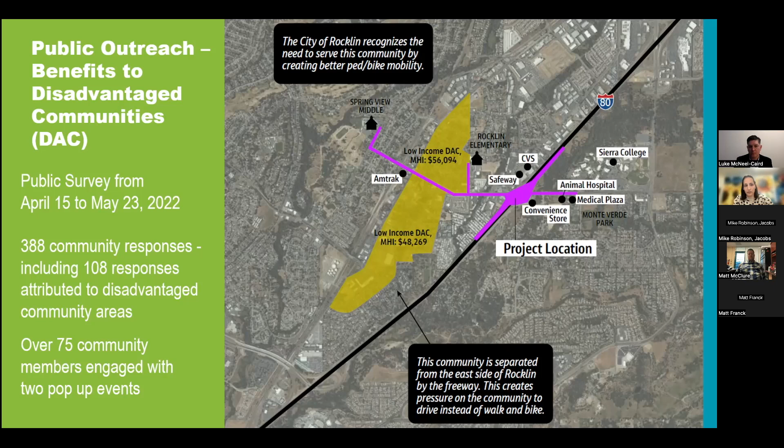This project originally dated back to 2011, 2012, where 3 additional concepts were being looked at as part of the initial project. Concept 1 was a westbound on-ramp flyover, more towards Sierra College, where at the Aguilar Road intersection an on-ramp would start and go over to the westbound on-ramp. That concept proved to require too much right-of-way acquisition, and it just couldn't fit in the land we had available.

Concept 2 looked at adding roundabouts at both the west and eastbound on-ramp intersections. Roundabouts have worked in Rocklin and other locations, but due to the installation of ramp metering, traffic would back up and essentially create gridlock in those roundabouts. So we moved on from those.

Concept 3 was to widen Rocklin Road to 3 lanes in both directions through the extent of the project limits, and that was extremely costly. So at that time, the project stalled out, and we have moved on now to what we're looking at currently.

Which is the diverging diamond interchange. We had a feasibility study completed in 2020, and after that proved a diverging diamond could function in this interchange, we began the environmental document process, which we are currently in. We started that back in July of 2021, and about a year later, in July of 2022, the first initial draft project report was submitted to both the city and Caltrans for review, with different iterations and comments going back and forth. That is currently where we are at for the project history.

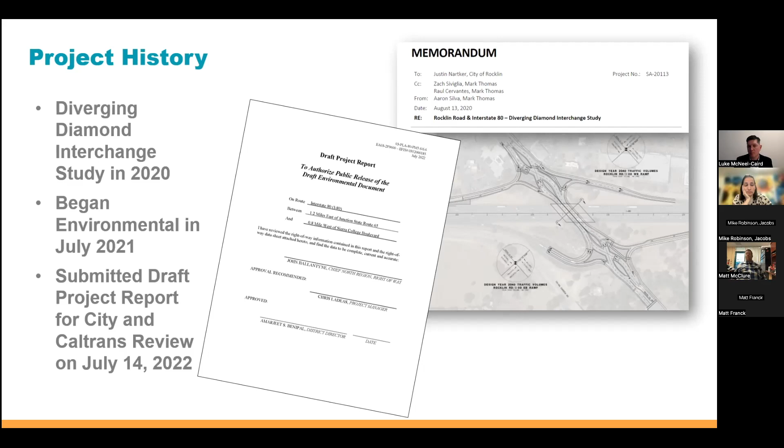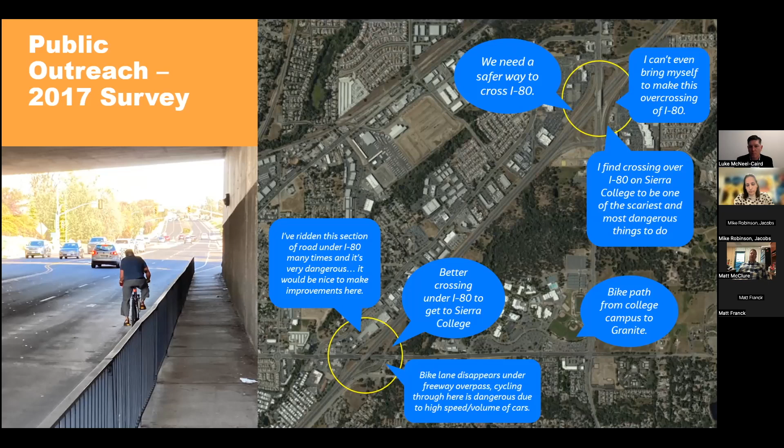Katie briefly touched on public outreach done specifically for this project, but there has also been outreach on a broader spectrum. Placer County Transportation Planning Agency did a bike way survey back in 2017. As part of that survey, this graphic shows comments gathered about not having connectivity from one side of Interstate 80 to the other within Rocklin, specifically at the Rocklin Road I-80 interchange. The community has been saying for a while that we need to address modes of transportation besides vehicle traffic, so that's what we're trying to address here.

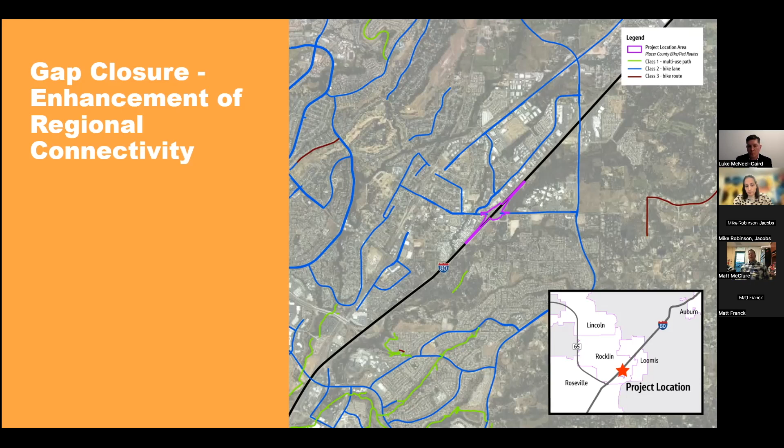This slide shows that our trail connectivity has gaps, and one of the big gaps, as you can see in the purple area, is Interstate 80 along Rocklin Road. Currently, the only way to get on trails is to go up to Sierra College Boulevard, which has even more congestion than Rocklin Road, or you can cross over in Roseville. Both are relatively out of the way for the traffic we're looking to capture and maybe change some modes of travel within the project limits. So this project is looking to close that gap.

We're also looking to assist middle school students. If you currently live on the east side of Interstate 80 and attend Spring View Middle School, it's difficult to walk or ride your bike to school. So one of the hopes of this project is to provide that connectivity, so children going to Springview Middle School have the option to walk or bicycle in a safer manner than they currently have today.

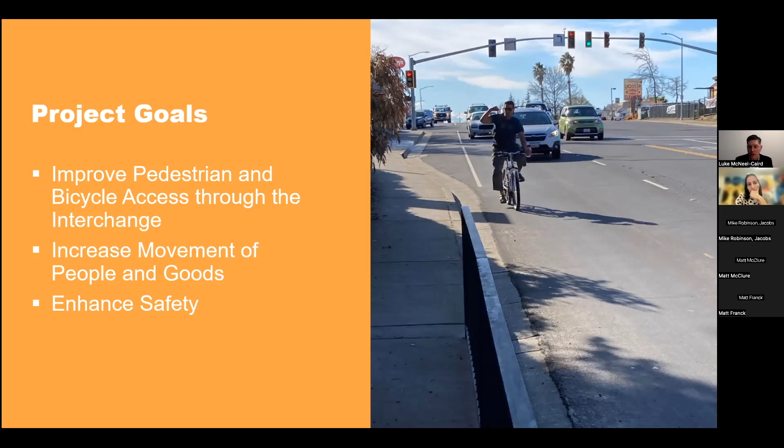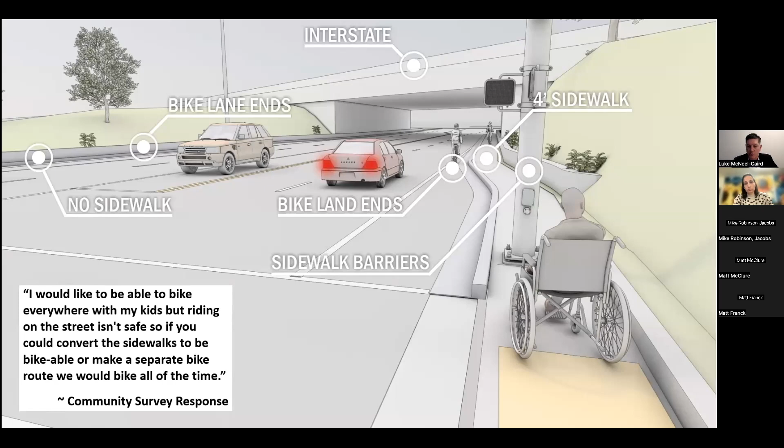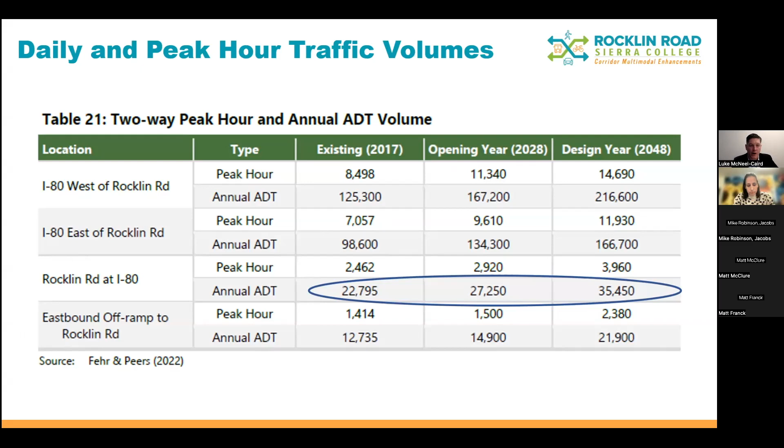You're going to see some of those features as we go through the project alternatives. One of the big things that came out is there's about 23,000 vehicles per day on Rocklin Road, and that's going to continue to increase. But of those 23,000 vehicles per day, we looked at cell phone data and found about 5,000 of them are driving less than 1 mile. So there's a real opportunity here with Sierra College and their 14,000 students for more walking and biking along the corridor.

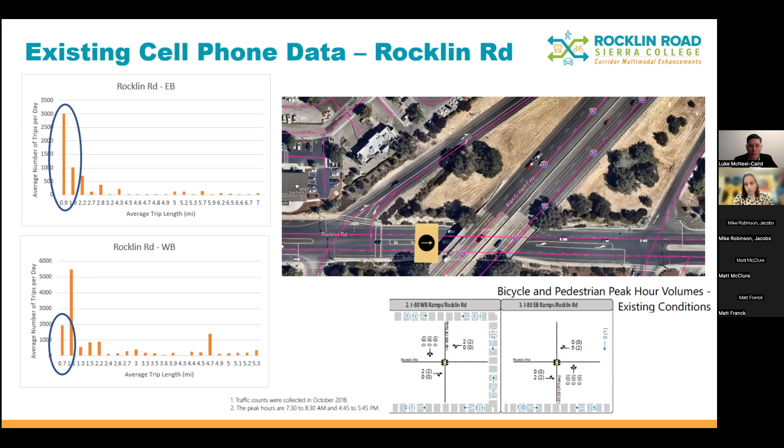We actually have a video here that's going to describe what a diverging diamond interchange is, and then it's going to walk you through the two proposed alternatives for pedestrians and bicycles.

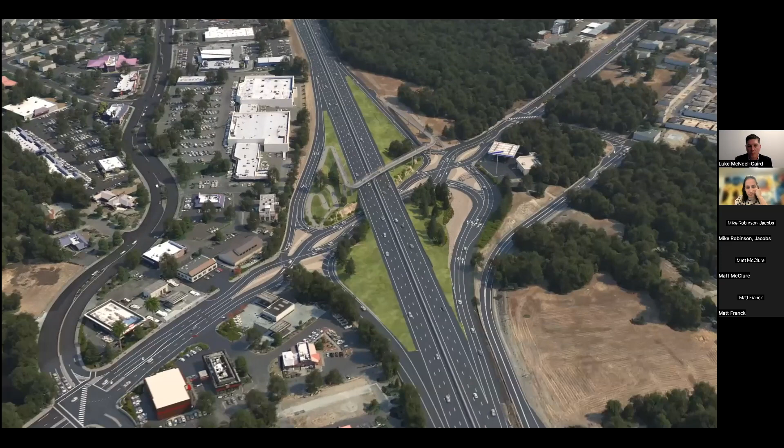The City of Rocklin, in cooperation with Caltrans, proposes to modify the existing Interstate 80 Rocklin Road interchange in Placer County to improve pedestrian and bicycle access, increase movement of people and goods, and enhance safety. The interchange is the gateway to downtown Rocklin and access to Sierra College. Rocklin Road improvements will include a diverging diamond interchange and a separated bicycle and pedestrian path.

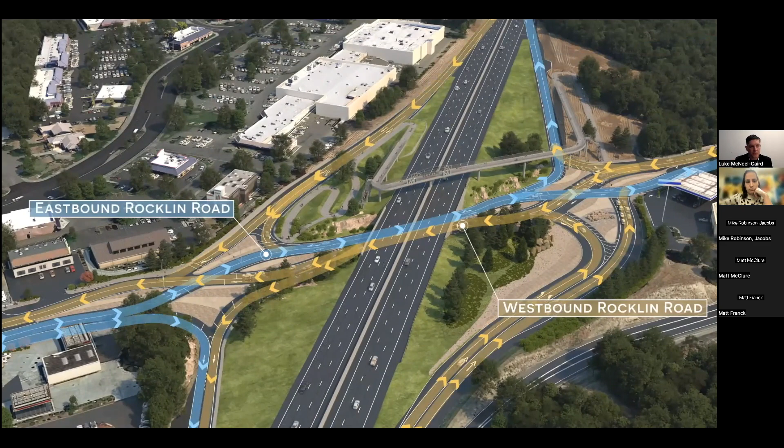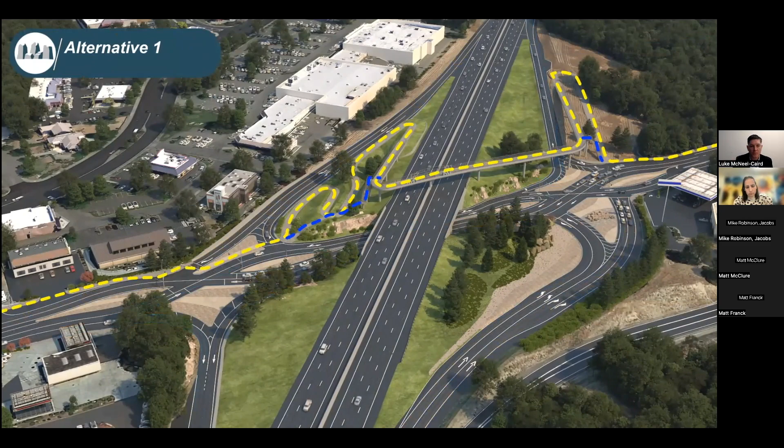Interstate 80 improvements include eastbound off-ramp widening and ramp meter installation on the eastbound and westbound on-ramps. Alternative 1 includes a separated bicycle and pedestrian overcrossing of Interstate 80. The overcrossing alternative utilizes the ramp infield areas north of Rocklin Road to ramp up a bicycle and pedestrian overcrossing of Interstate 80.

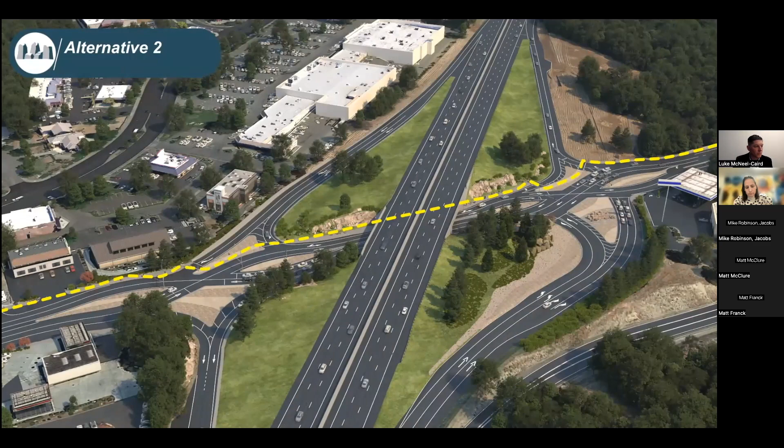Alternative 2 features a bicycle and pedestrian undercrossing of Interstate 80. It will include a path of travel parallel to Rocklin Road, with modifications to the existing Interstate 80 bridge to accommodate the designated path.

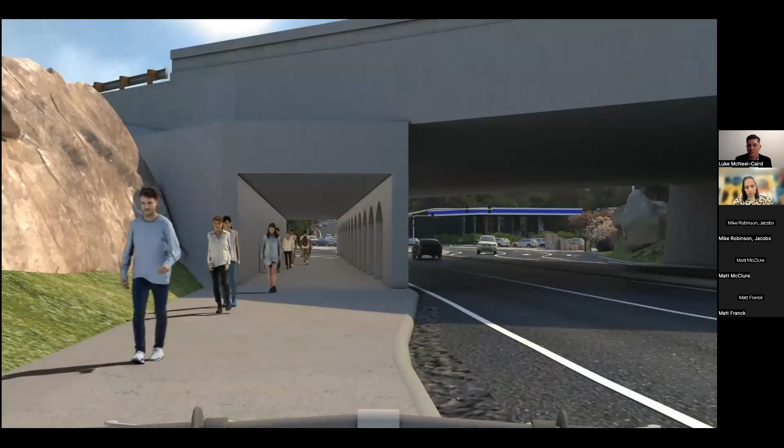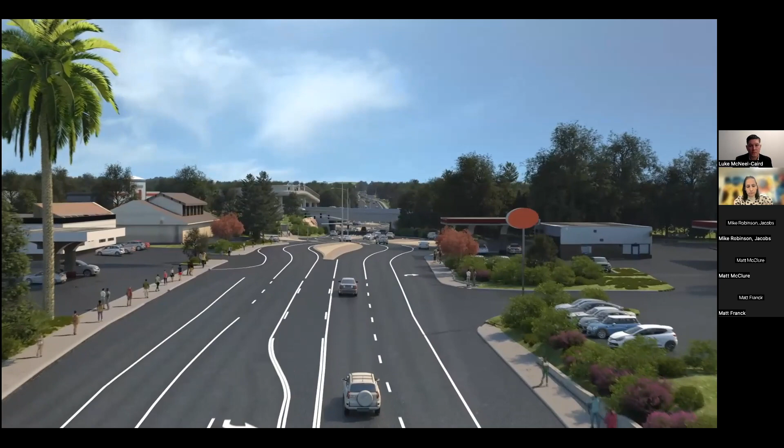Traffic on Rocklin Road will be controlled by a traffic signal on either side of the I-80 underpass, similar to today. At these signals, eastbound and westbound traffic will cross to the opposite sides of the road, travel under Interstate 80, then cross back to the other side of the road.

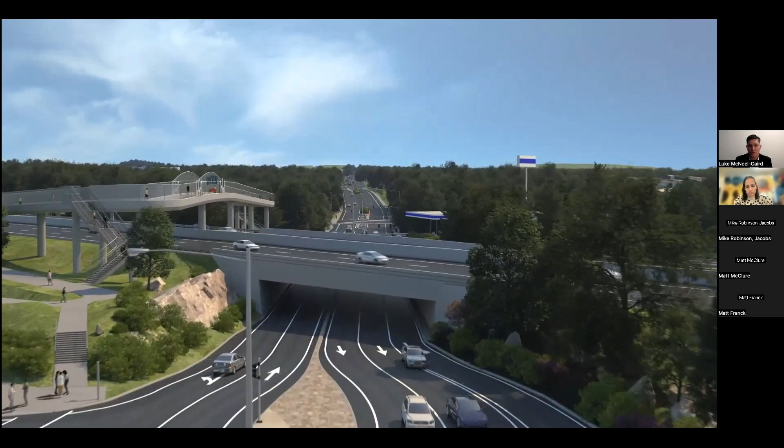The crossover movement allows a free left turn onto Interstate 80 for eastbound and westbound traffic. The westbound off-ramp from I-80 will be realigned to accommodate the DDI configuration.

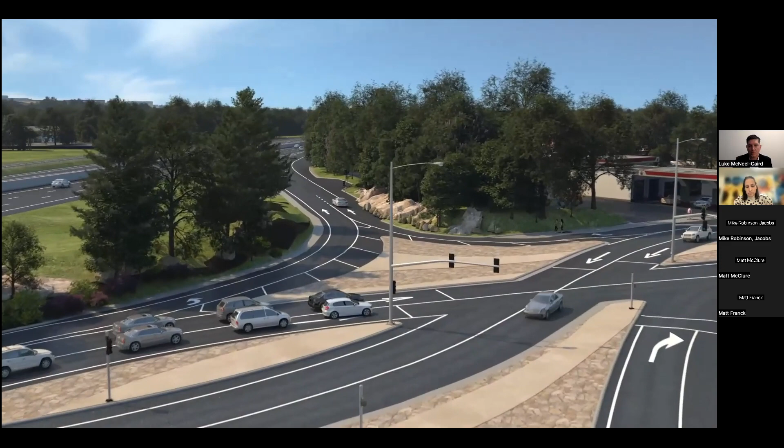Drivers turning left or right on Rocklin Road will experience a single traffic signal at the DDI crossover location. The westbound on-ramp will include a designated right turn from Rocklin Road, a 2-lane ramp meter, and a single-lane merge

onto Interstate 80. The eastbound off-ramp from I-80 will be widened from 3 to 4 lanes at the intersection of Rocklin Road, 2 for left turn and 2 for the right turn onto Rocklin Road. The I-80 eastbound on-ramp will still be a single-lane merge.

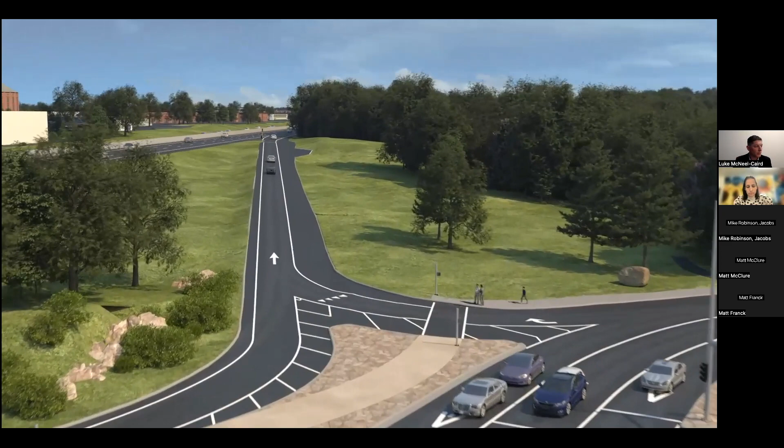The right turn on Rocklin Road will yield to the free left turn. A ramp meter will be installed with the ramp improvements, and the mainline merge length will increase.

Mainline I-80 travelers will experience little modifications from the Rocklin Road interchange improvements. It will be a visual gateway with the Alternative 1 overcrossing.

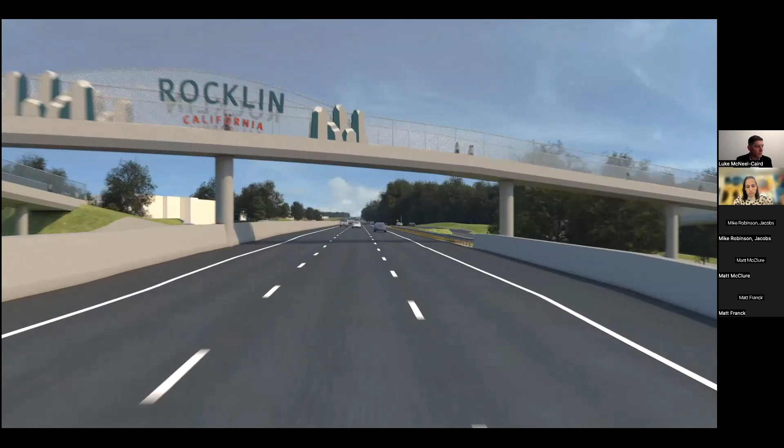The City of Rocklin is excited for an opportunity to create a visual gateway into the city with signature landscape architecture and city branding on the pedestrian overcrossing of Interstate 80.

The City of Rocklin is committed to cooperation with community and agency partners to increase the safety for vehicles, pedestrians, and cyclists at Rocklin Road and Interstate 80.

Studies show that diverging diamond interchanges create a reduction in crashes and increase the movement of people and goods. The separated pedestrian and bicycle alternatives also provide a path outside of the Rocklin Road travelway for non-vehicular traffic to cross Interstate 80 and access Sierra College and downtown Rocklin.

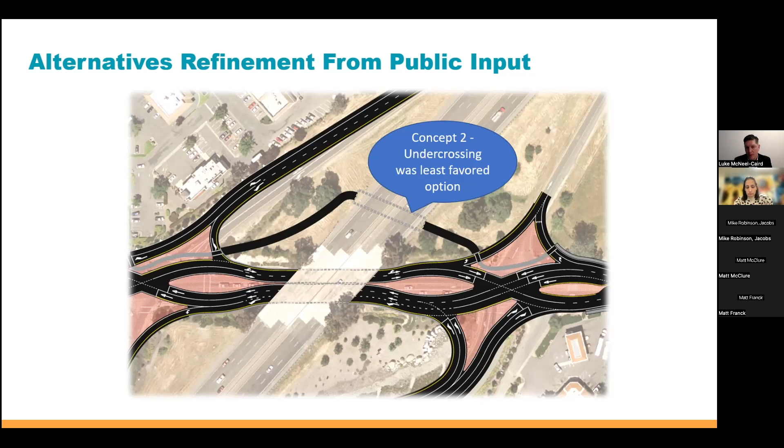So what we're bringing you tonight is we've gone through the Caltrans review process and the city review process, and we refined things. We've worked with property owners adjacent to the interchange to develop these 2 alternatives. And we're proposing these 2 alternatives to move forward in the environmental document that will be released for public review.

So this is alternative 1, the pedestrian bicycle overcrossing. The overcrossing is going to go up and over Interstate 80, and I'm just going to use a laser pointer here.

For the diverging diamond interchange, as the video showed, if you were coming from Sierra College, you would come along Rocklin Road and go through the signal to the other side of the roadway. Then if you're getting on Interstate 80 westbound, you'll have a free movement onto the ramp to head towards Sacramento.

If you're continuing on Rocklin Road towards downtown, you would then come to a second signal and go through that signal back to the other side and continue on.

Same with eastbound. If you're coming from Rocklin Road, you're going to come to a signal, go through that signal to the other side of the roadway. You'll have a free left turn onto Interstate 80 eastbound towards Auburn, or if you want to continue on towards Sierra College...

...you would go through that second signal, and that's the diverging diamond interchange concept.

With this pedestrian bicycle overcrossing, I've put some of the distances. This was a big concern about alternative one, the out of distance travel for pedestrians and bicyclists. You can see if you were just to walk along the roadway, it would be about 670 feet from Aguilar Road towards the west side of the interchange there.

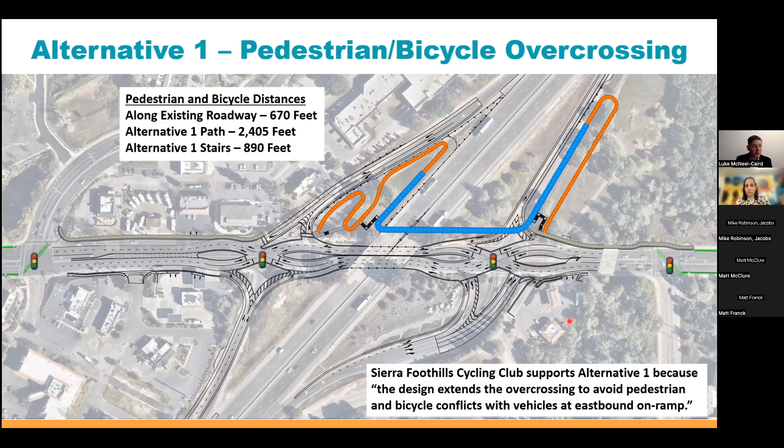It would now be a yield situation, and you can see the Sierra Foothills Cycling Club has now supported alternative one because of this improvement.

Alternative two is exactly the same as the diverging diamond interchange in terms of roadway improvements. The only difference is that the pedestrian bicycle path would go under Interstate 80.

I wanted to mention Aguilar Road. If you're a bicyclist coming along this path, you'll be able to hit a pedestrian bicycle button to trigger an all pedestrian bicycle phase, allowing you to cross diagonally across the intersection to get into the bike lane. Same at Granite Drive—if you're coming out of downtown as a bicyclist or pedestrian, you can push the button to get an all pedestrian bicycle phase and cross diagonally into this trail, so you won't have to cross twice. This helps facilitate bicycle and pedestrian movement.

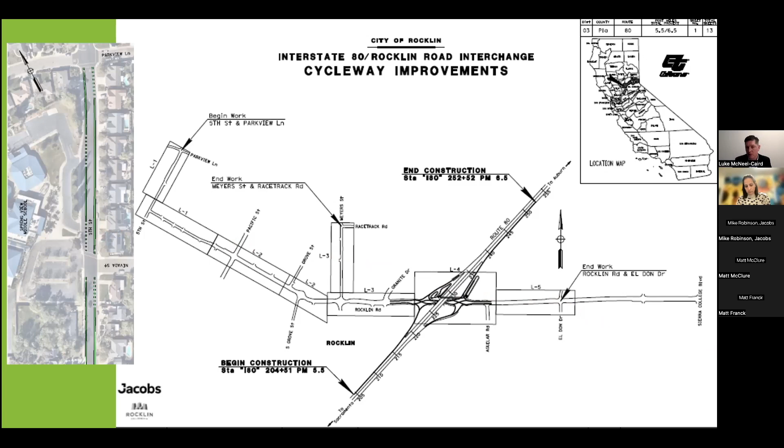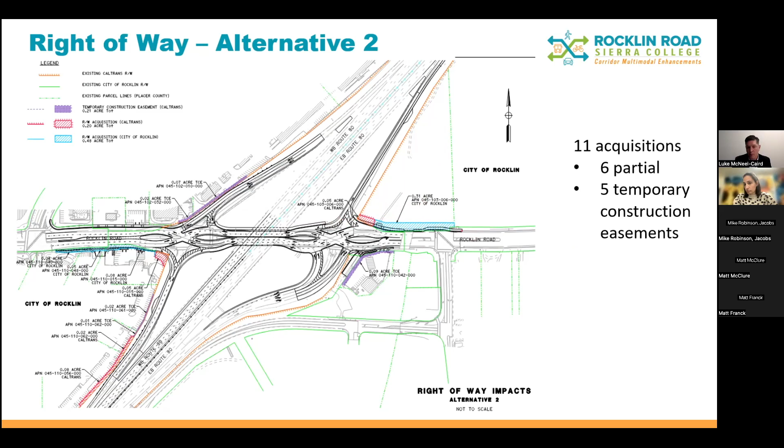For alternative 2, it's the exact same except for the northeast quadrant. Because we're crossing the eastbound on-ramp, with pedestrians and bicycles crossing here instead of going over, there's no need to acquire the full parcel, so we're just doing sliver acquisitions along the frontage of the parcel. All other acquisitions are the same.

I also wanted to touch on the westbound on-ramp—this is relatively new, something we haven't presented at previous meetings, so I wanted to show it in more detail. We have an area where we would do a temporary construction easement, getting in there to construct things and then returning the property to its original state after construction. But along the hotel, we do need to acquire the landscape strip, and we've been coordinating with the hotel property owner there.

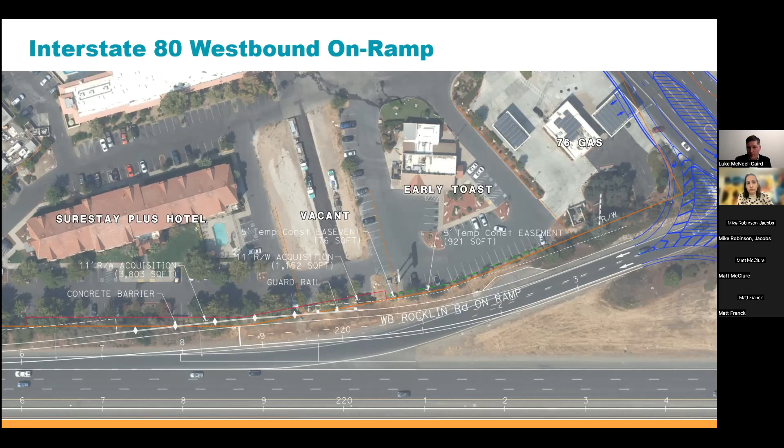We have developed landscape concepts for each alternative. The idea here is to maintain what's out there. There's a lot of monumentation related to granite along the eastbound off-ramp, so we're going to reconfigure that but really maintain the character that's already out there. With the pedestrian bicycle paths, we are trying to maintain the existing oak trees in the area so we can provide shade in those paths. And the natural granite, exposed granite on the north and south sides of Rocklin Road would also be maintained to preserve that aesthetic in the area.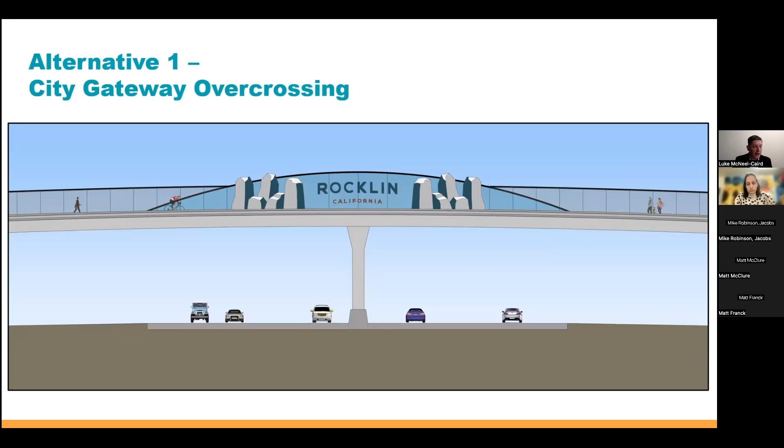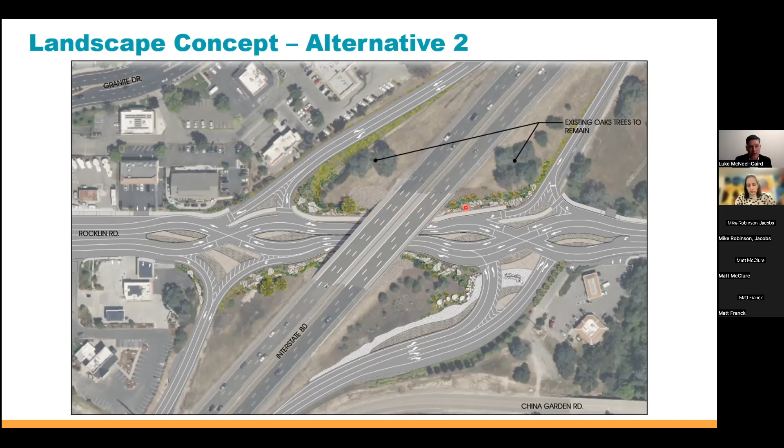And then alternative 2, landscape concept, very similar to alternative 1. The only difference is we don't have the pedestrian bicycle overcrossing. We would still maintain the oak trees in this area, but the pedestrian bicycle would go under, so we'd have to go into this exposed granite along the north side of Rocklin Road more, but we would still try to maintain that character of exposed granite as you're walking or driving through that area.

And then here's the City of Rocklin monument sign as you come off the eastbound off-ramp. Right now it's off to your left, but we would move it to the median between the left and right turns, so that as you're coming off, you can see a direct picture of the city of Rocklin. That would be the same for alternative 1 and alternative 2.

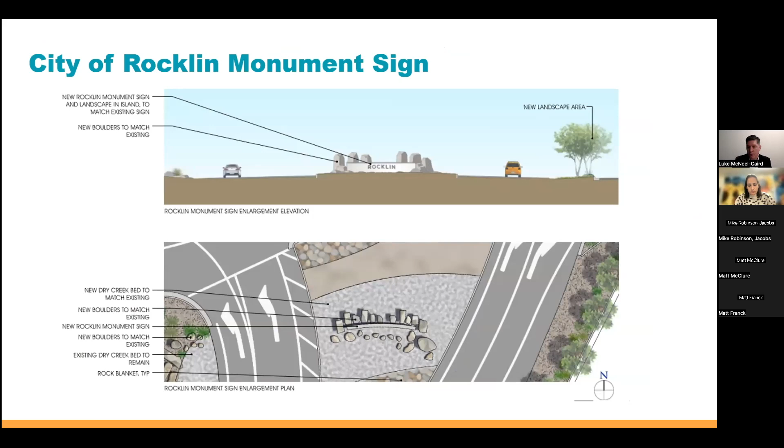Just to wrap up here, as we open it up to questions, the total cost estimate for alternative 1 is $42 million. The total cost estimate for alternative 2 is $45 million. So there is a $3 million difference in these two alternatives, and that's something the city is definitely taking into consideration as they try to secure funding.

We do have a plan for federal funding. We've already been meeting with Congressman Kiley in DC, and we also gave a project tour in November and December of last year. There are receptions, and the California Transportation Commission will be in town in Rocklin and Roseville next week, working to secure funding for the project.

Of course, in 2024 there are other opportunities. The Placer County Transportation Planning Agency is looking at a South Placer County sales tax measure, and projects like the Rocklin Road interchange are being proposed as part of that measure. And then there's also the Senate Bill 1, the gas tax that was passed in 2017. There are several competitive programs coming up in 2024.

The project schedule is similar but it's changed a little bit. We're looking at environmental approval by the spring of 2023, then we'd go into design and right-of-way acquisition through the end of 2024. Depending on the alternative selected, alternative one we believe would take 2 years of construction, so open to traffic by the end of 2026. Alternative two we believe would take about 3 years of construction, so open to traffic by the end of 2027.

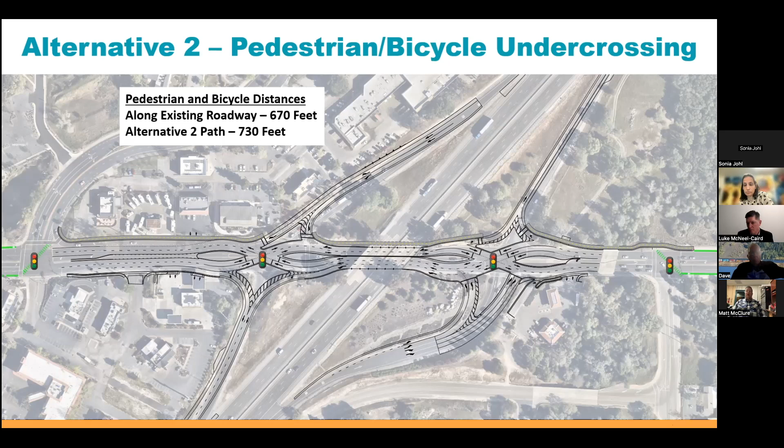Caltrans has given us verbal approval for that. As far as the construction timeframe, I'll give that to Luke and maybe Mike to discuss in more depth, but there are going to be impacts. I'm not going to sugarcoat it — during construction there will be impacts. It's part of construction, unfortunately.

So are we going to be recompensated for this downtime? Once the environmental documents are approved, we're not actually acquiring any right-of-way from you, but there will be a temporary construction easement, so there will be a negotiation once the environmental is approved.

The City of Rocklin wants to be a good partner and maintain access to your business during construction. But it's going to be detrimental to me, access-wise and with the downtime, so I'm wondering how we're going to reach an agreement on that.

What I can tell you is throughout design, we're going to keep the stakeholders and the public engaged to let them know what's going on and what the plans are. Again, once the environmental documents are approved, we can discuss the issues further.

My other question was, is all this funding coming just from City of Rocklin, or are we using Placer County as well? It's a combination. The city is putting in money from their development impact fees, and PCTPA, the Placer County Transportation Planning Agency, has a regional impact fee program — that's the $16 million. The remaining funding would come from state and federal grants, and of course there was also the mention of the sales tax measure.

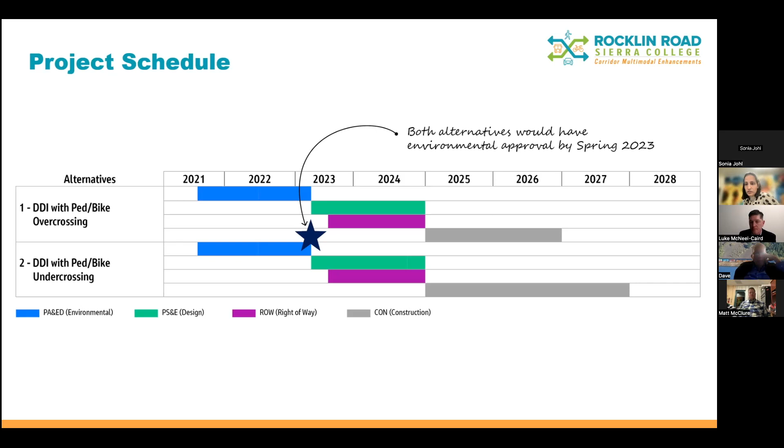I have another question from Michael. Previously, the consultant said the off-ramp on the eastbound side going to the right would not allow a right on red. Seems like going to the right, where there isn't traffic, should be allowed.

Mike, you might have more to say about this — the eastbound off-ramp right turn on red will be allowed. Ultimately the operations of that signal will be up to Caltrans, but we've designed it, and there was a small change since our last public meeting that ensures we meet the necessary sight distances at that ramp terminal to allow the right turn on red. So as of the current design, right turn on red should be allowed there, for both lanes.

Reading through some of the comments, Peter commented that lower speed limits within the roundabout areas and between them should be marked and enforced. Great comments, just making sure we hit everybody.